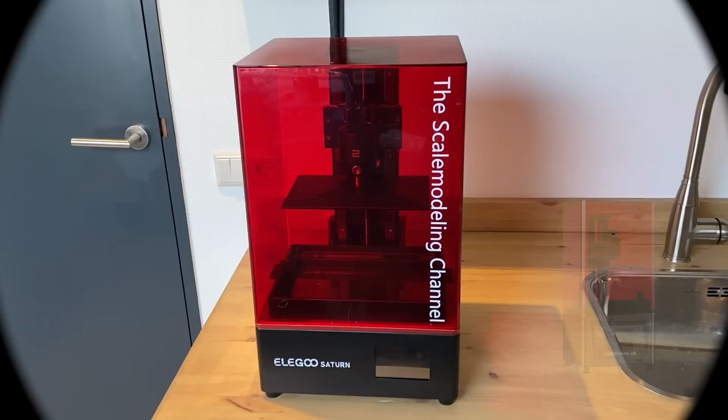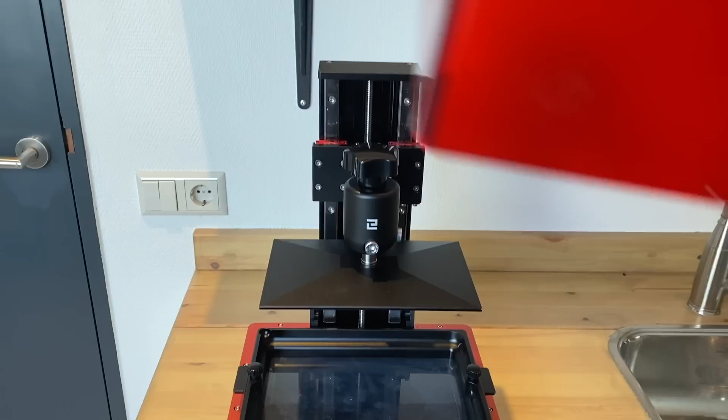A couple months ago, Elegoo sent me their Mars 2 Pro for you guys to test. This time, it's something bigger, much bigger. We're having a look at the Elegoo Saturn, basically the bigger brother of the Mars 2 Pro. It has similar specifications, a 4K screen, it's super quick at printing, and it's basically just twice as big. So the prints come out just as nice.

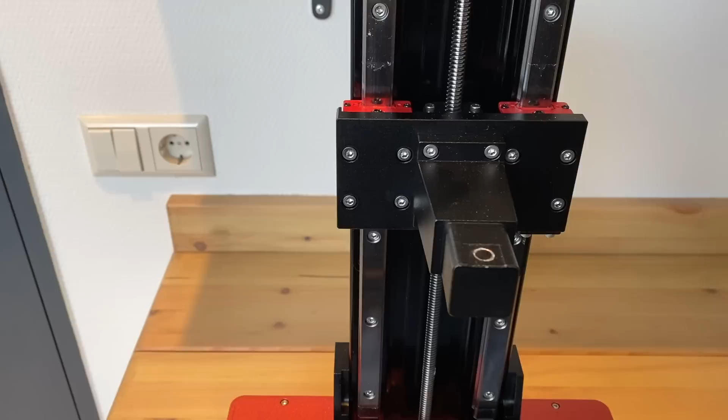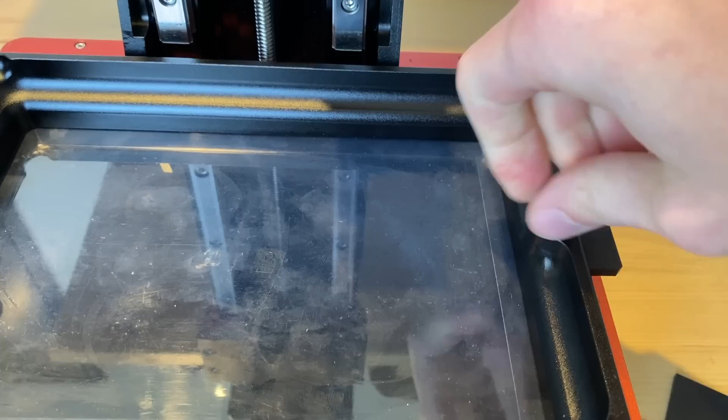The machine feels super sturdy. All of the materials are mostly made out of metal or super strong and thick plastic. The Mars only has one rail to hold the build plate up, but the Saturn actually has two. It's logical since the print bed is twice as big, so it needs to handle a lot more material, and it doesn't hurt to have it a lot steadier.

The print vat itself, which holds the resin, is held in nicely with two screws on each end, so it can't really be misplaced. If those screws don't fit, it's not fit in properly. And on the underside, it also has a couple bolts that fit into the platform around the screen nicely, so it seats itself really easily.

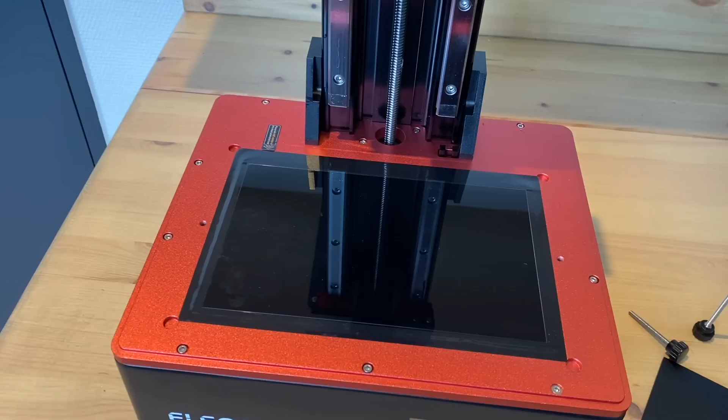Those screws on each corner of the resin vat also make it really easy to just set the vat down. As those screws are lower than the actual FEP film itself, they sort of act like feet, and you can set it down on a surface without touching the FEP film or scratching it. You can then easily put it back in place. It falls into all four slots on the corners, and those screws are just there to tighten it and hold it in place.

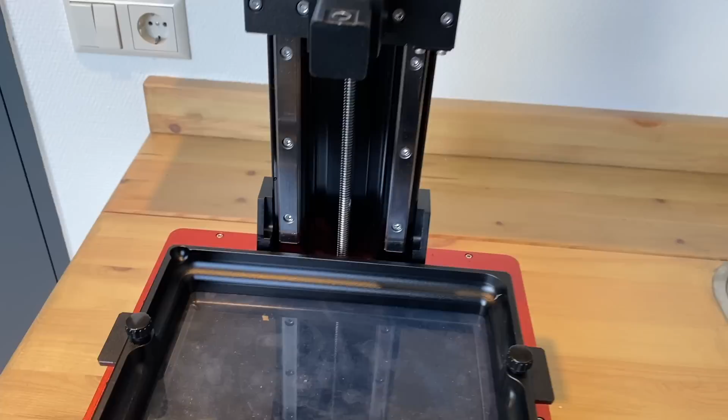The main build plate is also really easy to just put back in. Screw that big screw on top really tightly just to make sure it doesn't move, and you're pretty much good to go after plugging in the power on both ends and turning the machine on.

So the printer is almost ready to go, and in the meantime we just want to move on and create some files. For this I'm using Chitubox. This is a slicer that's supposed to go with the Elegoo machines.

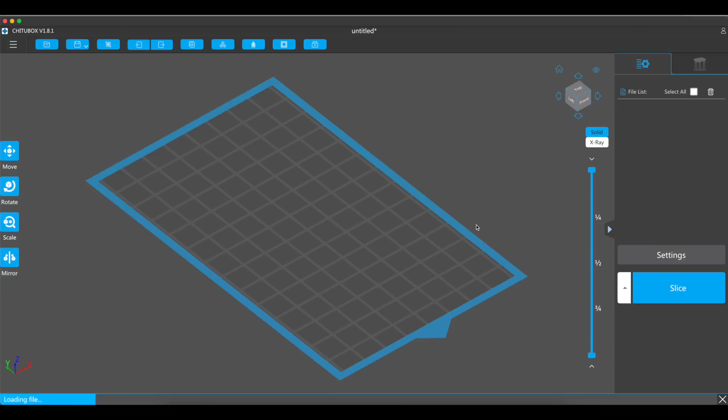It's a really easy to use program. You just put in the file that you want to print, and that's going to be sliced into all the different layers that are going to be printed one by one. But in the program you can also alter the parts a little bit - you can move them around on the build plate, rotate them, make them bigger or smaller, and also mirror them.

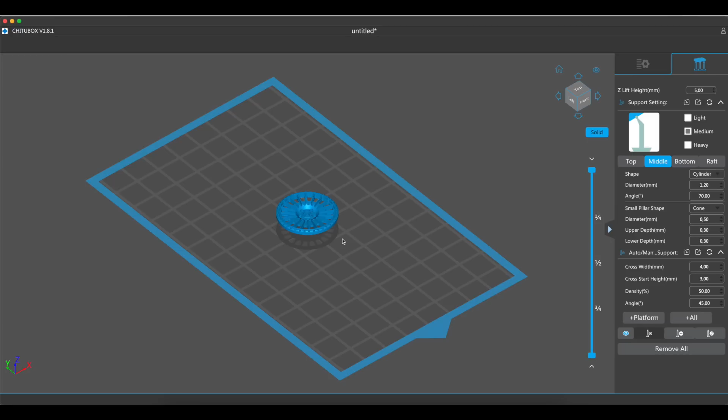Before you can start printing, the file needs to be supported. You can go with the standard supports automatically added by Chitubox, but I personally am not a real big fan. They are just general supports, and most of the time I find they're either not enough or just located really inconveniently. So I'm just going to add a couple supports manually and then set it up to print.

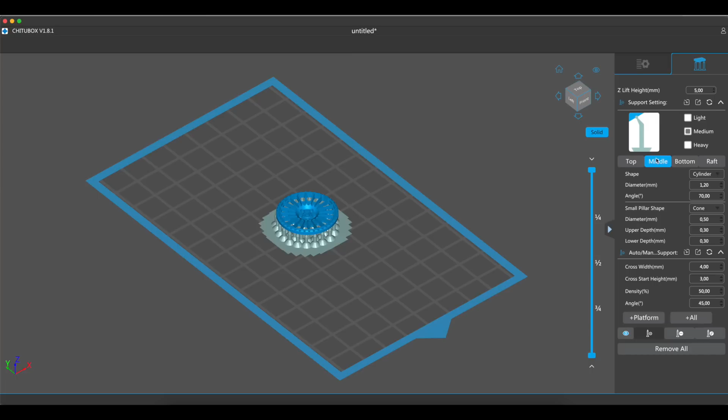Chitubox was still set up at the normal Elegoo Mars settings, so I'm going to change that over to the Elegoo Saturn, and that changes the build plate volume as well, pretty much making it twice as big. So we can just add a couple more wheels to fill that up nicely.

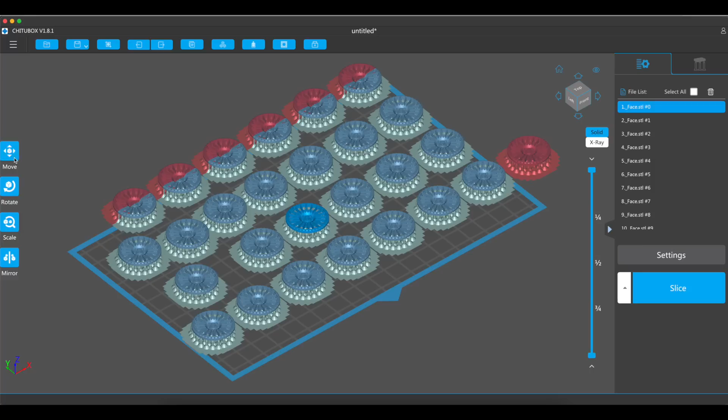So obviously with the Saturn, it's not only a plus point that the machine is bigger so you can print actual bigger things, you can also print more things on the same build plate. For instance, I can fit one set of wheels and barrels on a normal build plate for the Mars, and in this case on the Saturn I can double that amount.

As far as settings go, I'm no expert at all. I'm just going to do 5 bottom layers and set the layer height at 0.01.

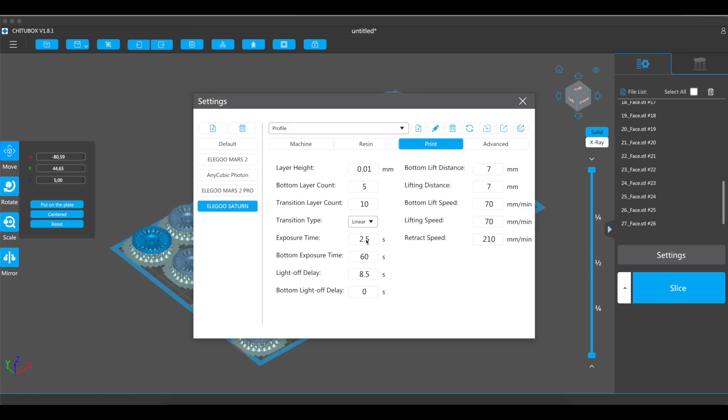This is the finest layer height that this printer can do, and is the finest layer height I would advise, as you can't see the print lines anymore anyway. The cure time is going to be 2.5 seconds per layer. Once that is all set, I can move on to slicing the file and plugging it into the printer.

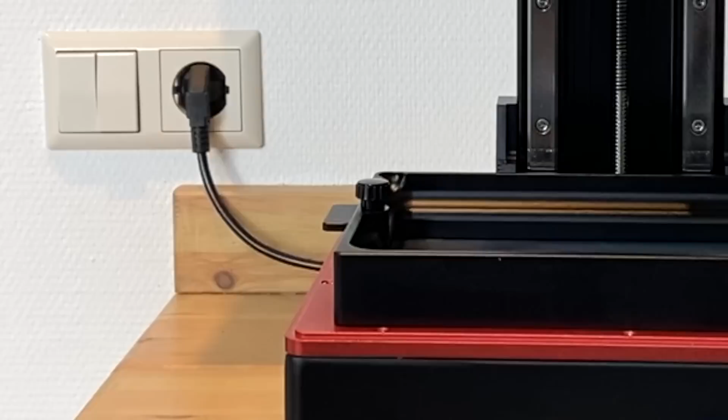If you're going to be using the printer for the first time, I would recommend to remove the vat first and level the print bed.

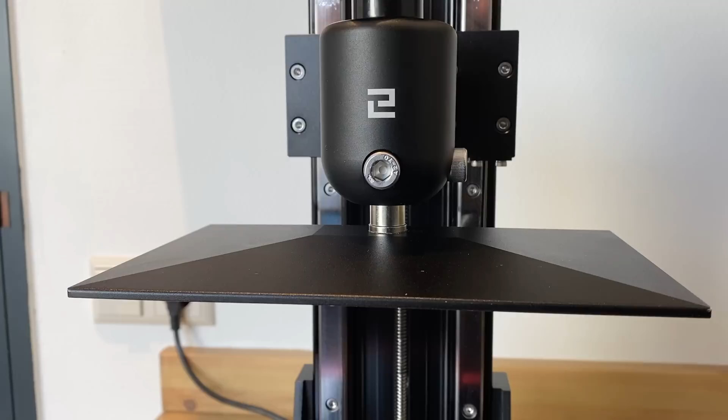The print bed is held in place tightly with 2 screws. These need to be undone a little bit. The print plate then drops down and is free to move. In the machine settings, you're then going to manually move the build plate to its home position, and then also place the leveling paper on the screen. This is included with the printer.

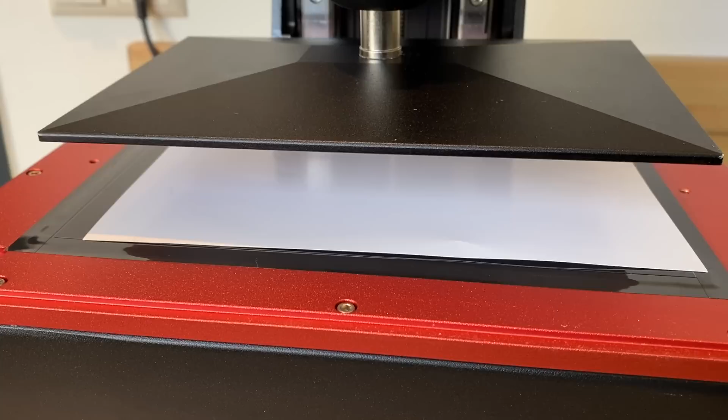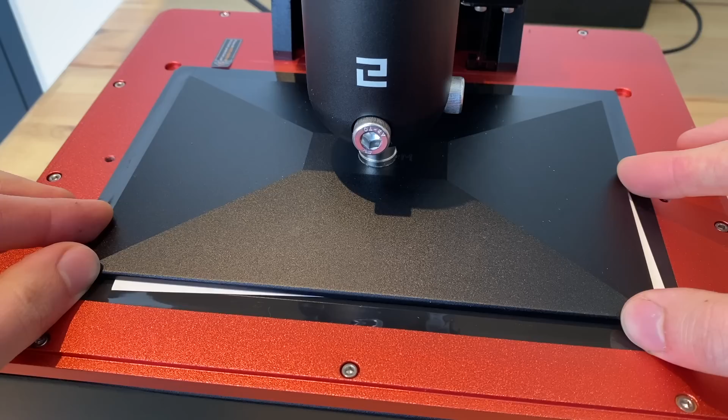Once the print plate is down and in the home position, make sure that it is oriented correctly and lightly press it down to make sure that it absolutely has nowhere to move, and then tighten both screws. Then go one step back in the menu and set the Z at 0. Raise the build plate up about 10 centimeters, reinstall the vat, and you're pretty much set.

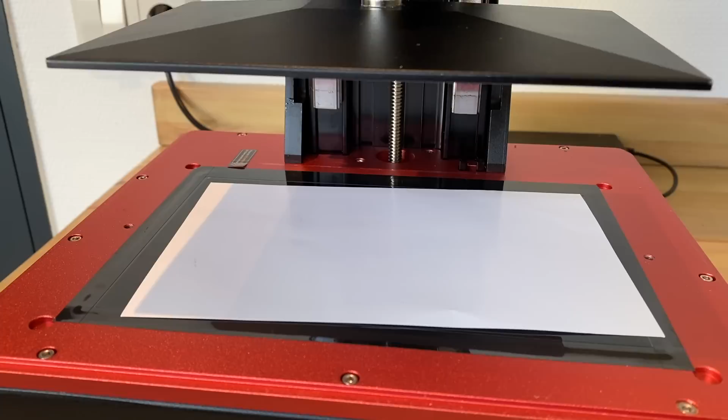During testing, I have used a couple different resins from different brands. All of them have so far worked really well in the printer. For this example, I'm just going to use the Elegoo ABS-like Gray. Shake up the resin really well before pouring it in, and then you're good to go.

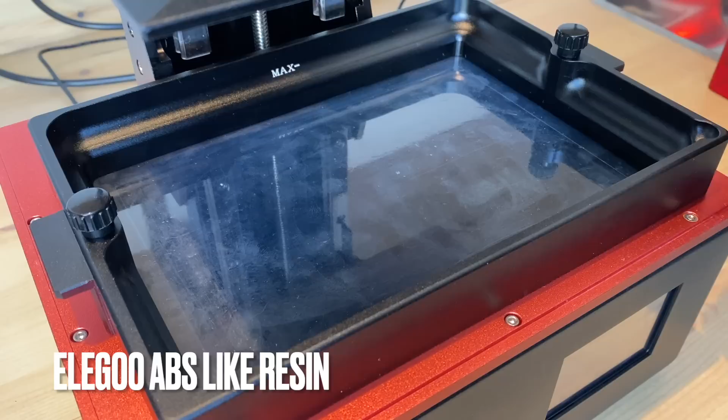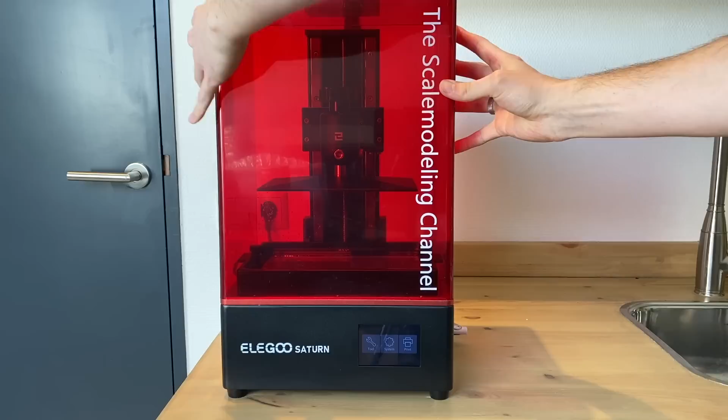Keep in mind the resin cures when it comes in contact with UV light, so I advise to put on the UV protective cover before and during printing. Now if there is no UV light in the room, you can leave it off, but just keep in mind that it does give a bit of an odor, so I advise just to put it in place and not take it off during printing, and keep it on as much as you can.

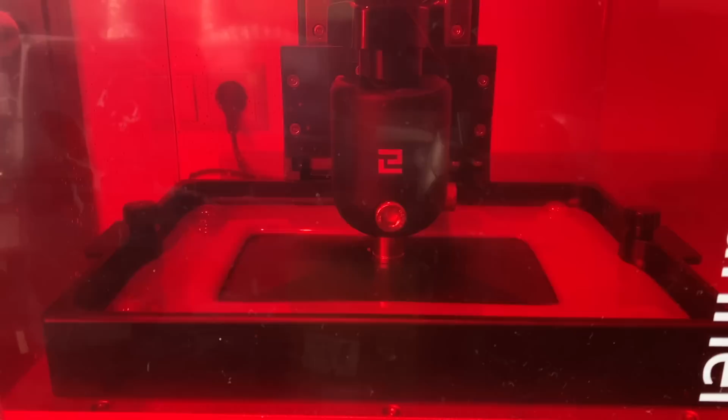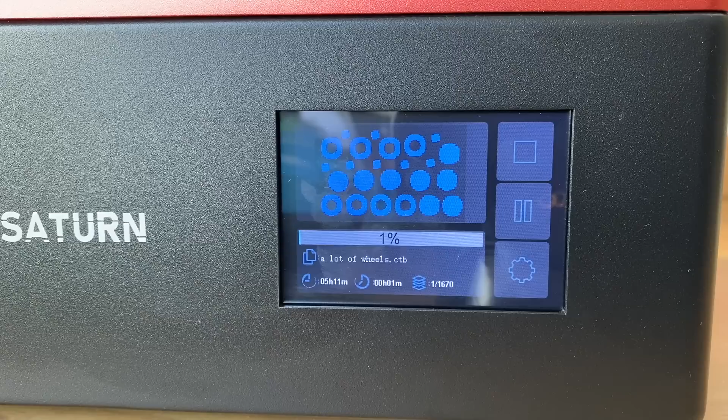Then select the file on the machine and start the printing process. The first couple of layers are going to take a little longer than the rest, as those are the adhesion layers on the build plate itself. Depending on how many you have set up in the settings, it will take about 5 to 6 minutes for those to complete, and it will then slowly start to move on to the regular layers for about 2 seconds each layer. A couple hours later and you're done.

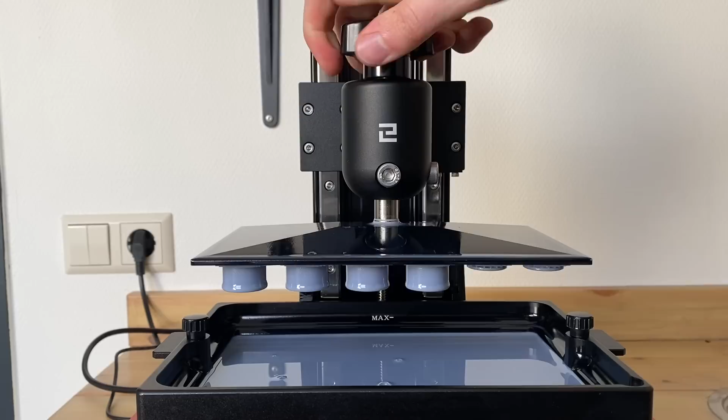So just as a little comparison, I set the regular Elegoo Mars Pro next to it, and as you can see, it is quite a big difference.

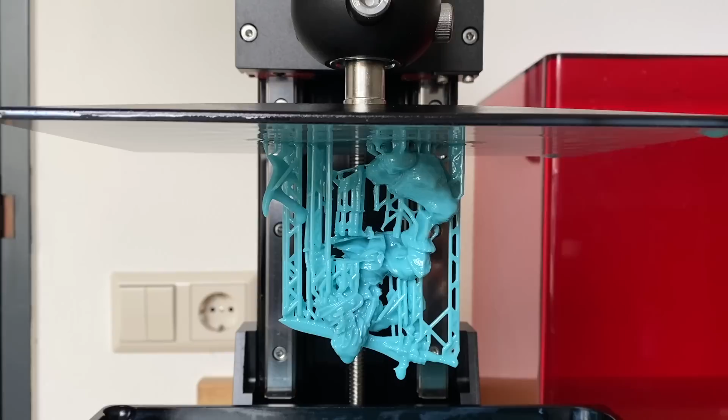One of the other features I do want to highlight as well, I've seen this on Uncle Jesse's channel. He's a great channel about 3D printing and does a lot of content, and also shows a lot of tips and tricks about these resin printers.

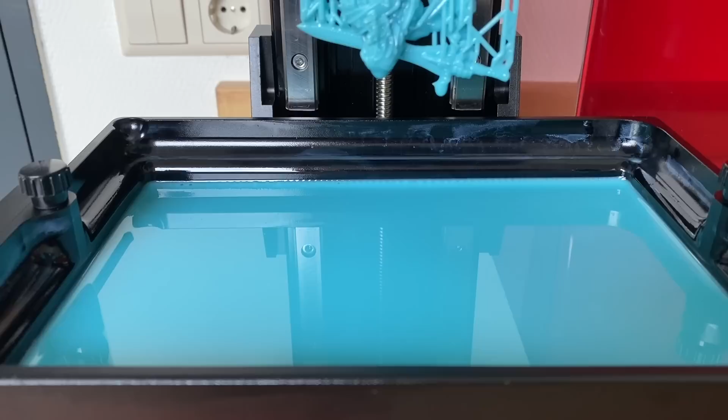So this print partially failed. I'm not really sure why. It probably has something to do with the supports that I added, and that they were simply not enough. But that of course has the risk that some of the parts might have dropped into the actual resin vat itself, and those need to be cleaned out.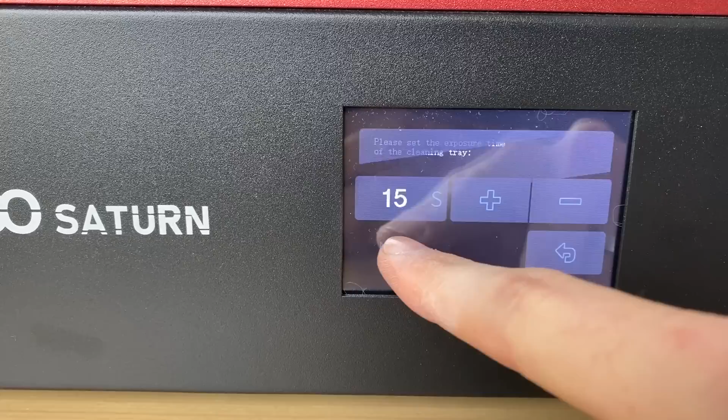Now on this specific machine there is a tank clean function that just exposes the bottom layer of resin to some UV, which cures it and also makes all of the parts that are stuck to the bottom stick to that as well. So instead of having to clean out the entire tank and make sure that all of the residue has been scraped off of the FEP film and potentially damaging it, you just have to tear off one small sheet of resin.

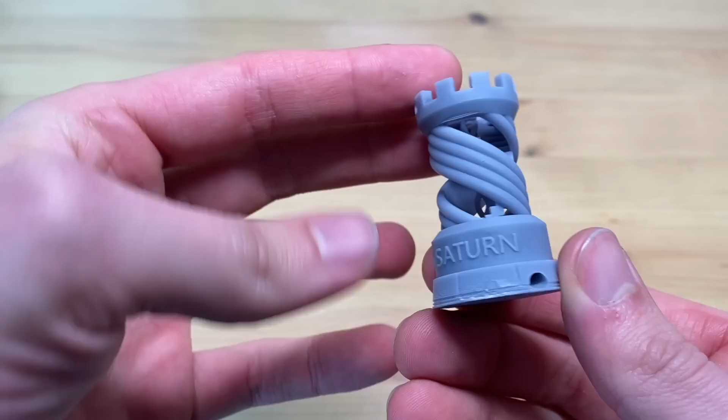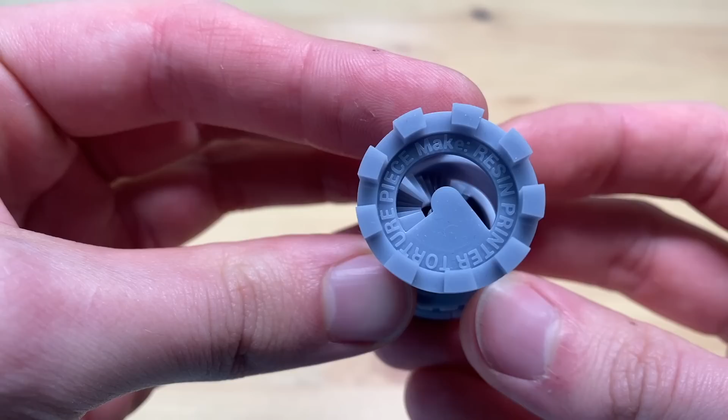So over the course of a couple of weeks, I gave this printer a really good test. I ran several different types of resin through it, and also did several different sizes of prints. This is the Rook. This is the first test print you're supposed to do to make sure that the printer is installed correctly and it prints perfectly fine. As you can see, there aren't really any imperfections on this, so the printer was set up really well and ready to go.

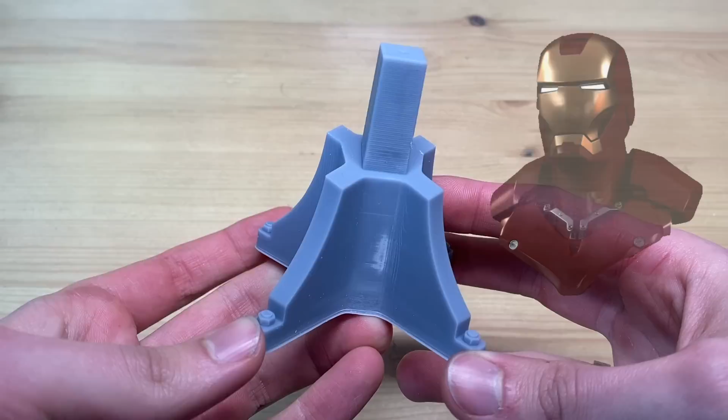After that was said and done, I moved on to my first big print. I decided I wanted to print a big Iron Man, and I quickly discovered that I might have been in over my head. The layer height on this one was set at 0.05, and as you can see there are still a couple layer lines, but it does really capture all of the details really nicely.

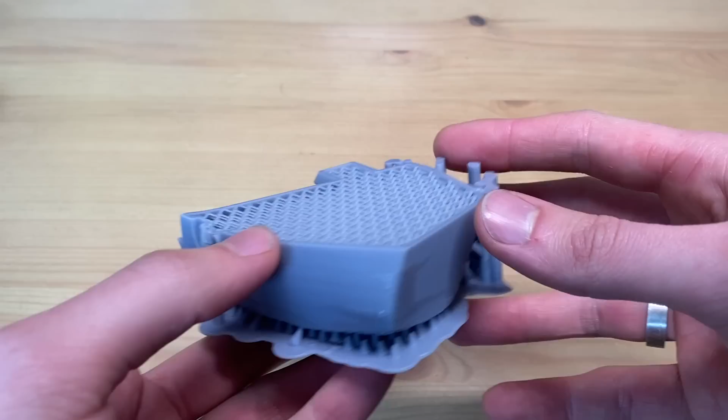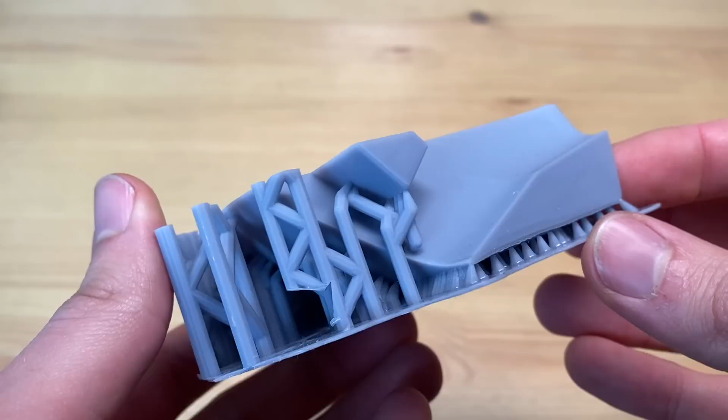After that first piece was printed, I quickly wanted to move on to the second piece. This is just one of those pieces, and it's pretty darn big. That is when I really noticed I was in over my head, as this was eating through resin like there was no tomorrow. Halfway through the print, the vat was empty and I was out of resin.

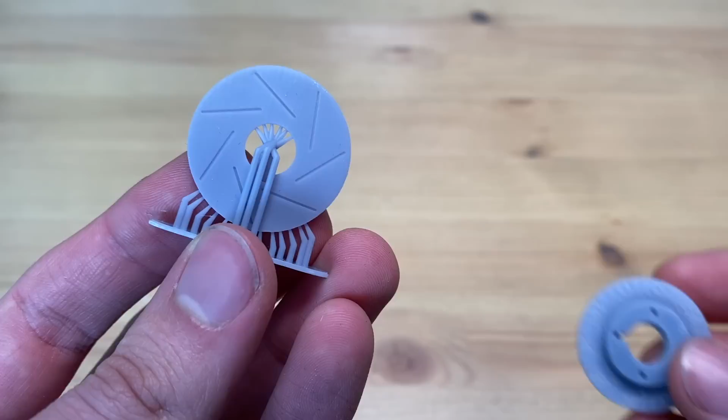So for now I just decided to sideline the Iron Man project, but you can still see the quality of the print. It wasn't cleaned up properly, so there is still a bit of mess on the side, but everything was cured before I touched it.

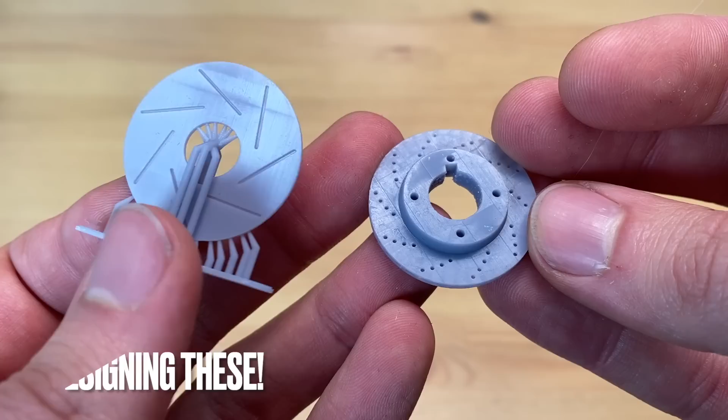I got some more resin in, and I decided to move on to some projects that were actually usable for some of my builds. As I just showed on screen, those were the new brake discs for the Peugeot 205 that I'm building in 1/8 scale. All the details are captured super nicely, and the parts came out really crisp.

A couple really loyal subscribers that I asked for help reached out in the video of the Peugeot build to design a couple of those parts. I had a couple different iterations for some brake discs that I'll be showcasing and probably using on the build itself, and someone also designed this fantastic set of wheels.

I printed the wheels twice, once with a 0.05 layer height on the left, and also once at a 0.01 layer height. Again, these are not properly cleaned, so there is a bit of a mess on it, but overall the parts are super crisp, and I'm really happy with what this printer is capable of doing.

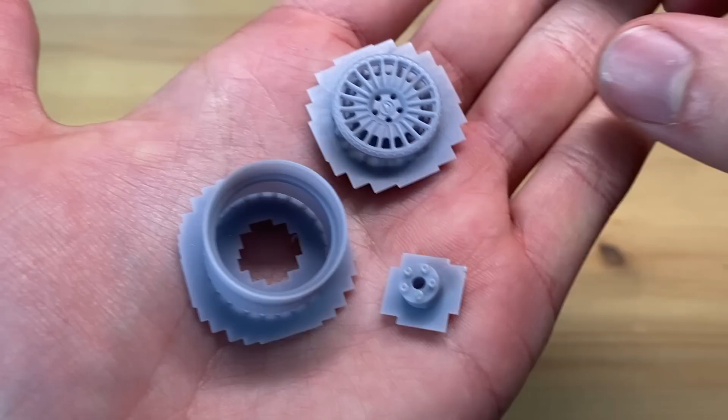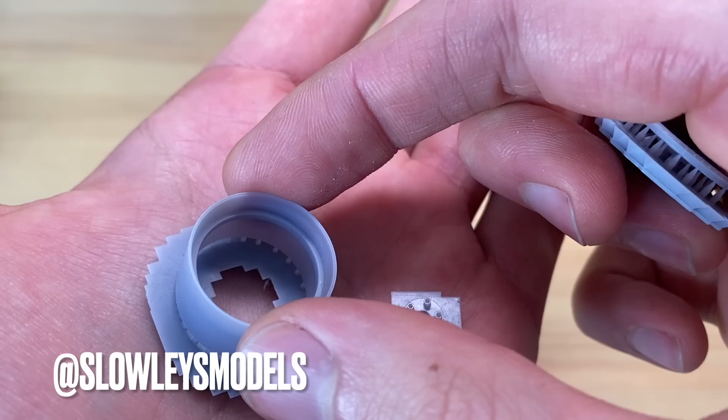To showcase it even more, these are the prints that I showed you in the ChituBox tutorial a little earlier in the video, and some of the other parts printed for these wheels as well for my friend Casey Slowleys Models. It does print small parts really nicely too, so you don't just have to do it for the bigger prints. The smaller prints are printed perfectly fine as well.

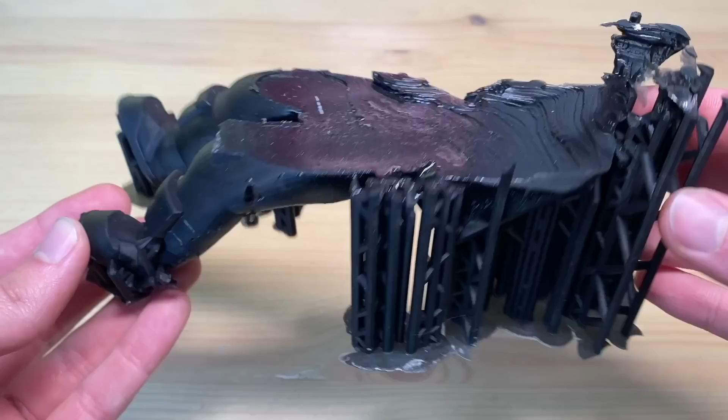And then again, I was still printing with the water washable resin. I ran into the problem of this thing eating through resin, and I again ran out halfway through the print. It's a really sad thing, but that is purely my own fault, as I simply didn't have enough resin for these prints to actually complete.

Even though I did not successfully complete the print of this astronaut, the water washable resin was not at fault. All of the details were captured really nicely, and it printed just the same way as I've experienced with other resin types. It doesn't smell really bad, and again, it cleans up really easily. If you're thinking of giving it a shot, I would definitely recommend doing so.

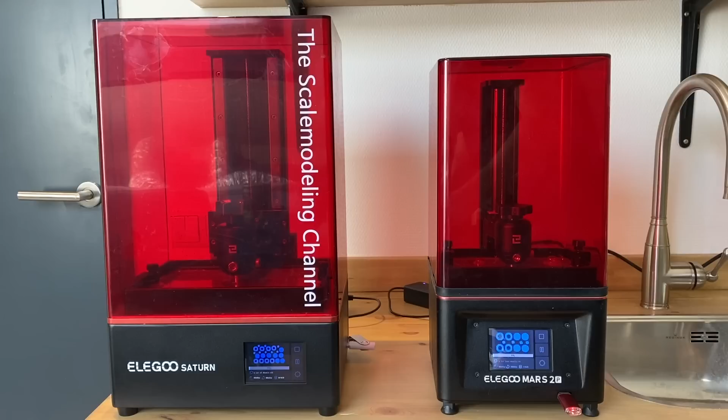So the final verdict on this printer, if I would advise it, yes, I absolutely would. Though I would ask you the question of what you're going to be using it for. It is a really big printer, and it's better at printing either large volumes or fully filled print beds than it is at smaller prints.

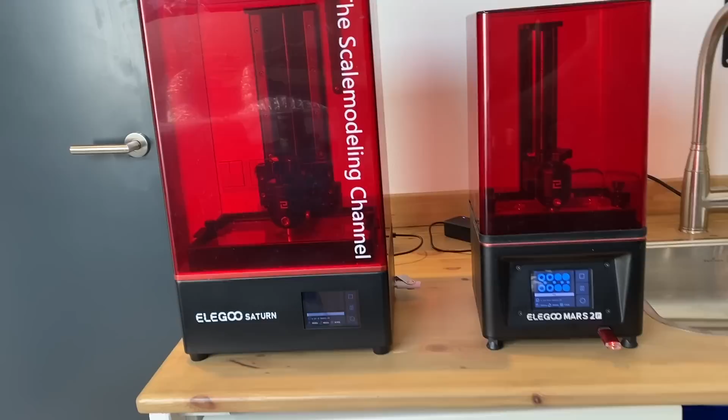With smaller prints it does still have a lot of resin in the vat. It's a bigger print bed, so a lot more cleanup, and it does print just as well as the Elegoo Mars 2 Pro. So if you're going to go for some smaller prints, lower volumes, I would go for the Mars 2. If you're going to go for either a production style volume, just filling up the build plate, or simply want to print huge things, then this is the absolute best printer I could advise in resin form.